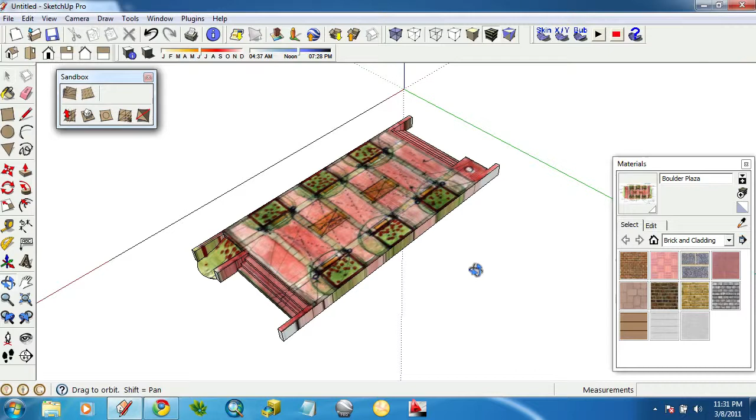Before I go into showing you how to create components out of the different planters, let me show you how to do a little bit of topography on the edges. It's exactly like I just showed you, with a couple different tools and at a larger scale.

On this side, I'll do something very simple, just a kind of flat area with a little bit of an arc. Nothing too fancy, but just so you can see what that looks like. I've got those 4 edges selected, hit the sandbox tool again, and it looks about like that.

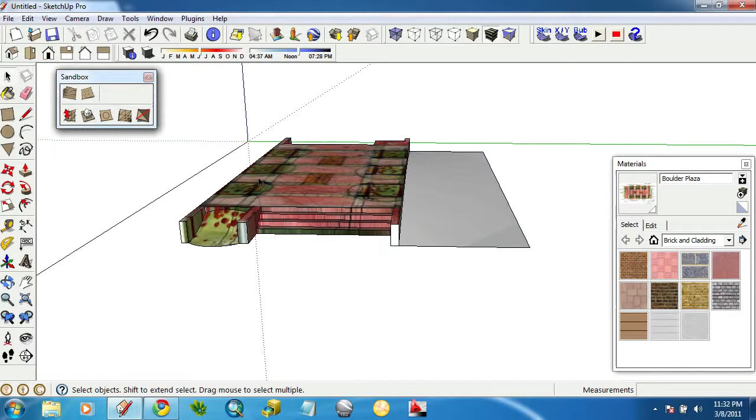Not so bad. On this side, I'll make it a little bit more detailed using the arc tool. The arc tool is really neat because it draws tangent points when you start from the end of an existing arc. Notice how that curve there is showing me that it's tangent.

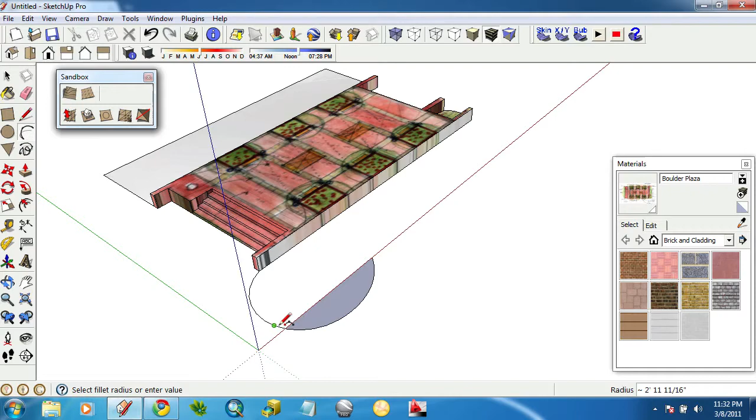Oh, I must have a line floating in there. From that point, this one won't work because of that line. Let's get rid of it. That must have been a remnant line from the image.

So you don't have to do everything completely straight in SketchUp. For this one, instead of doing a curved edge along this vertical wall, I'll just do 2 straight lines.

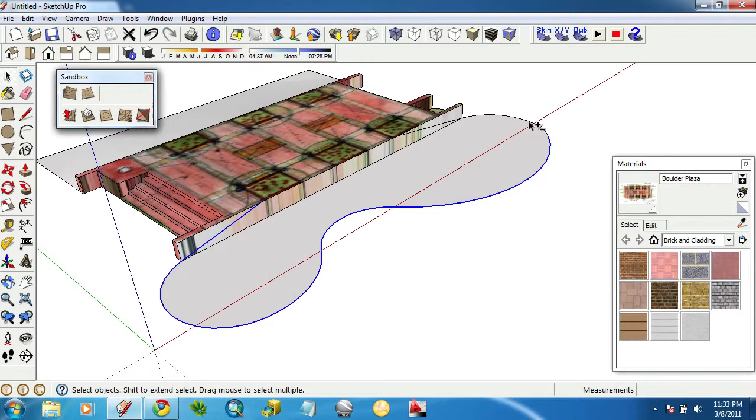This is a little experimental, so I don't know if this will quite work, but select tool, and very carefully grab all of my edges. There we go.

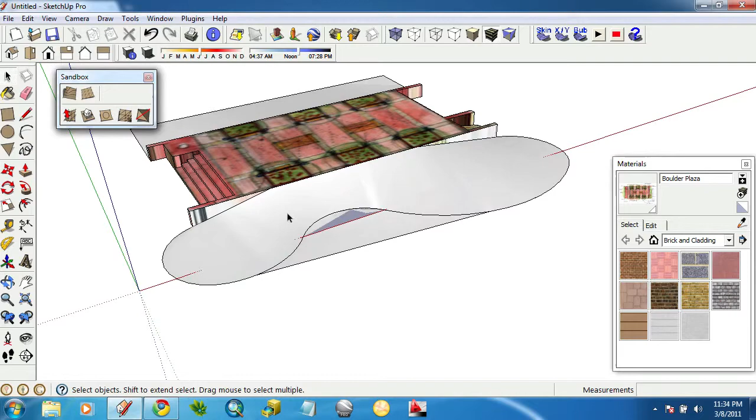And hit from contours. Whenever you've got an area that kind of bends in like this one, you'll get excess geometries. A really easy way to clean that up is to edit the component by double clicking and then turn on your hidden geometry. And we can see all of this extra junk in here.

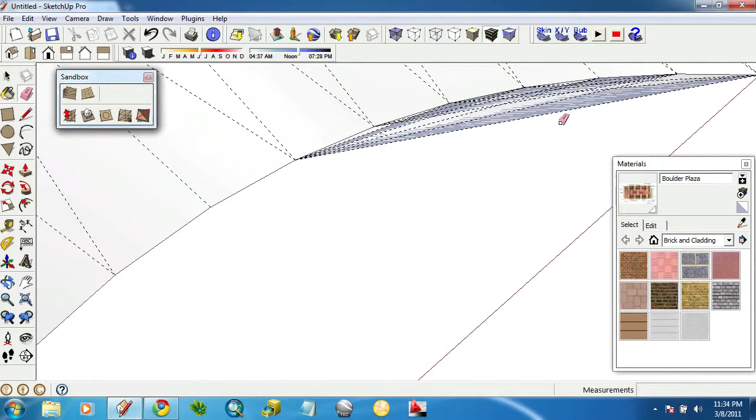So I'll take the eraser tool and click and drag very slowly. If you're picky like me, you'll probably jump in here and get rid of those as well. Oops, a little bit too much erasing. That's alright, let's just heal that surface by connecting that line there.

So there we go, fairly believable organic edge. Let's turn off hidden geometries.

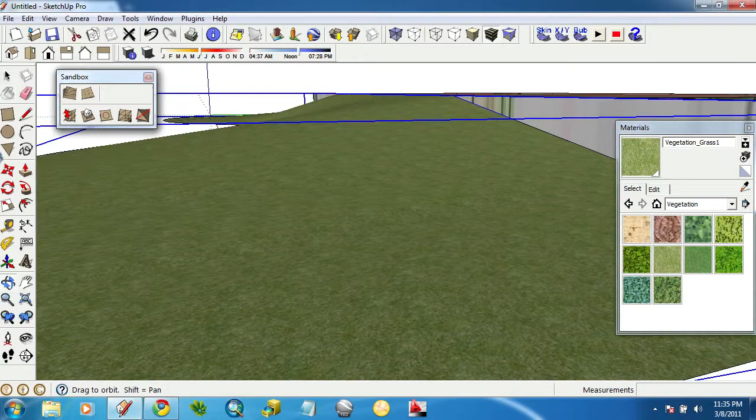And for textures, if you wanted to paint this as a grass texture, there is a vegetation setting in your materials. These are okay, not super nice, but we kind of run into that same thing as before. For grass it doesn't really matter, you can't really pick up on that broken glass effect, so that's actually not too terribly bad.

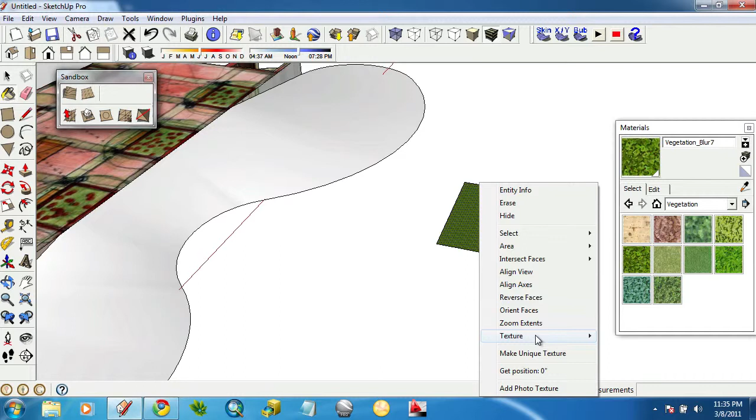Over here you can start to see it, but if you ever want it to be truly projected, you'd want to first apply it to something outside of that image, like this surface that I just drew. Let's use that one. Then right click, then make sure it's projected. Then you'd want to sample it.

Now on Windows, you've also got the sample tool living over here on your material browser. So alternatively, you can grab that and then edit this surface or this component and apply. So it seems like a lot of steps, but it's not too bad.

But since we're on the topic of textures, let's revisit importing an image, or importing an image file as a texture. So I've got a little box here, and for the sole purpose of something to apply to, I'll go to File, Import.

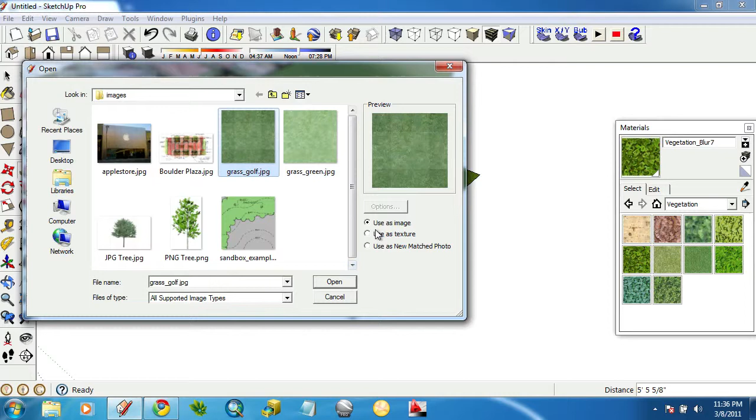Now in the Images folder from the files available on Blackboard, there's one here called Grass Golf JPEG, and it's just got a little crisscross pattern. But this one, when you use it as a texture, it will repeat based off of its first input.

So if I click right here, that will be the size of my repeating texture. I'm going to make it about that big. And notice that that square is now repeating.

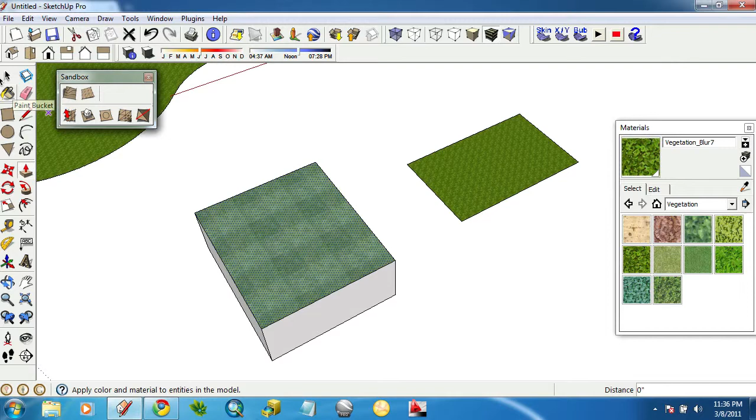If I right click on that and go to texture and then position, you can see the size of that image. The size of the actual image will be in between your 4 push pins. I won't get too much into the push pins right now, but it kind of gives a nice little effect. Let's go ahead and sample that.

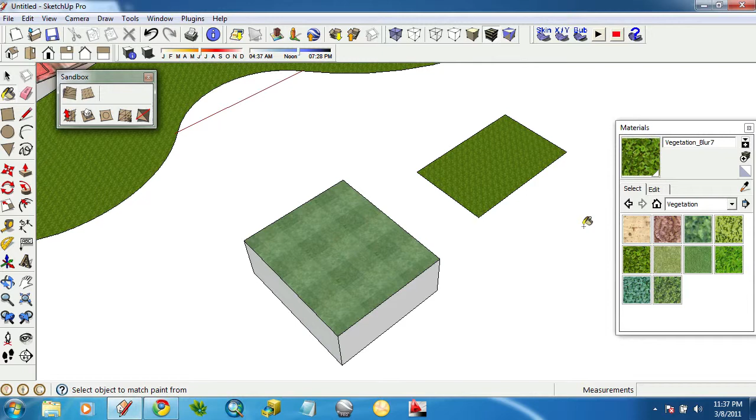Oops, and I forgot a step. Right click, make sure it is projected. Just trust me, it won't work quite right if you don't do that. Then sample it, then edit your component that you'd like to put it inside of and apply.

So someone is being very anal with the lawnmower on that side. Let's do it on this side too. Oh, and same thing as the other side, we've got some extra geometries, and I've mentioned that Z-fighting before, so let's fix that.

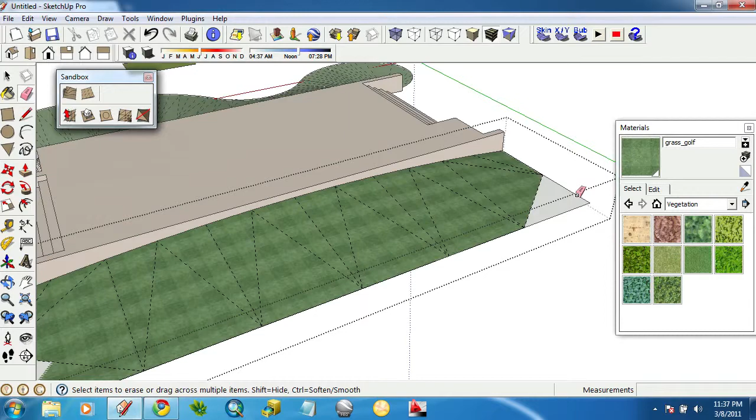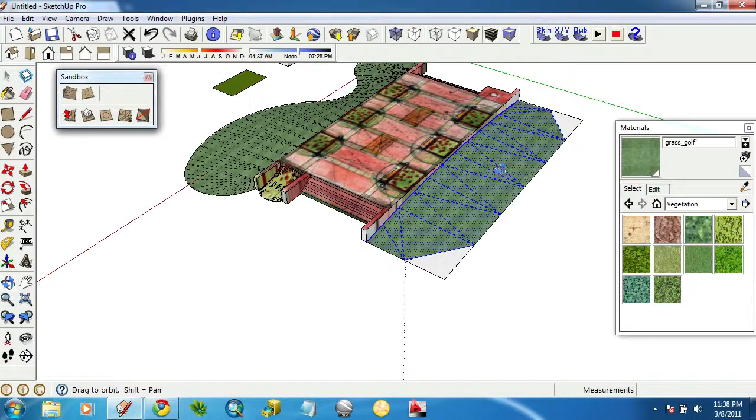And if you ever don't want these to be components anymore, all you have to do is right click and select explode. So I generally tell people that you should kind of keep things in components, but if it's a real simple model, it might be a little bit easier, especially when you're learning the ins and outs of SketchUp, to go ahead and explode those.

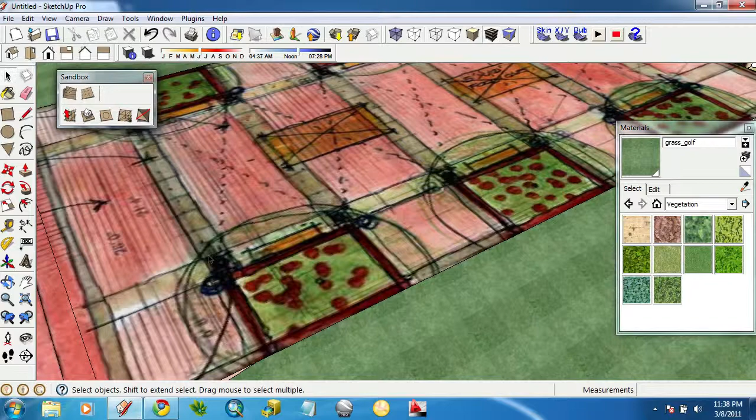So I will turn off hidden geometry and get rid of those guys. Alright, so now finally on to the review of where we were in class, and it was turning these into components. So all I did was draw a box around that free form geometry, and with it selected, the surface and the edges, I will make that a component.

Good idea to name these too. Otherwise you'll end up with a lot of components. Now, and I forgot a step. Right click, make component.

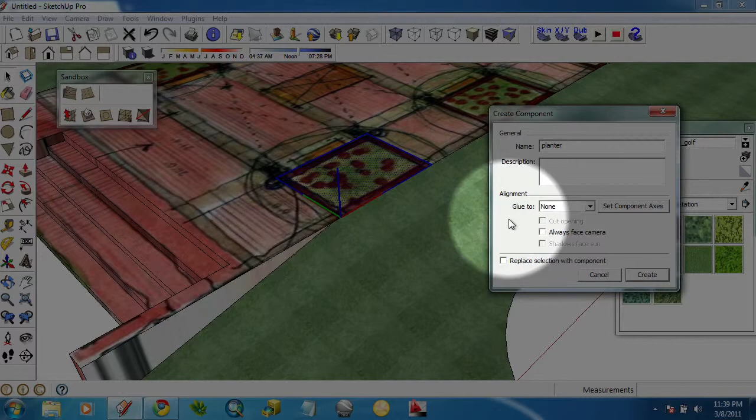This one, very important. If it has shared geometries, you know, this edge is shared with that surface, by default it will not replace the selection with component. So make sure that that is checked. Now it will prompt me if I want to replace it. I'll hit yes. But notice when I click on it, it is its own component.

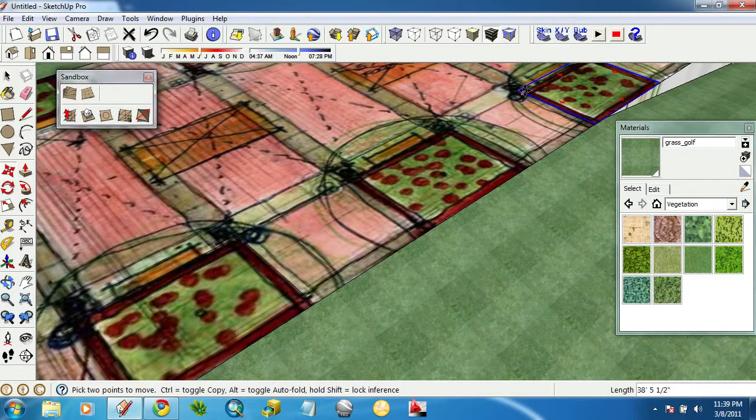And I'll go ahead and make a copy of that down to here. Do a 2 forward slash. Now that put a copy there. But now, you know what?

I'll just go ahead and select those. Do a copy. And then I will scale those by negative 1. And then I will move those to the opposite edge, making sure that it snaps, and then I will do a paste in place. So again, I'll review what we just did in class, but repetition is good.

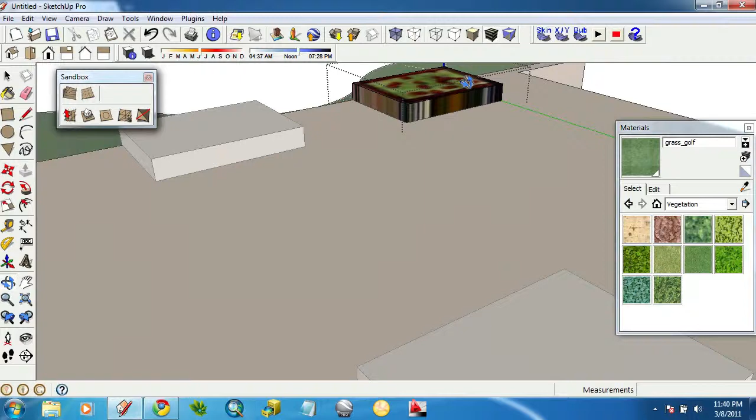So I'll push pull it up 18 inches. And give this a little bit more detail. Slightly different way that I did it in class, but still results in kind of the same thing.

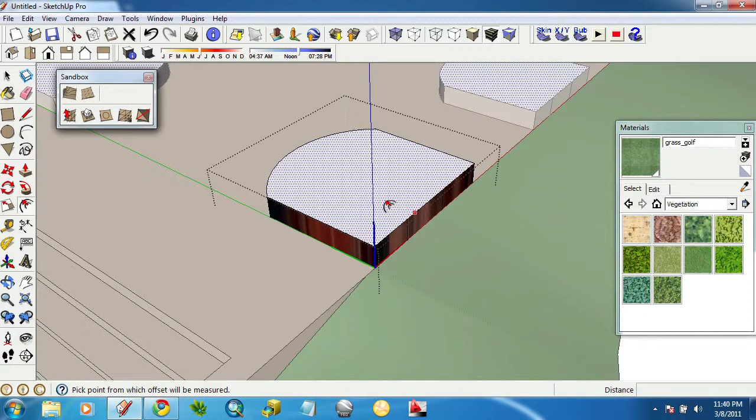I'm not too worried about the textures because I will just paint over them anyway. Grab the offset tool, grab the push-pull tool, and let's go to in-model textures and slap this one here.

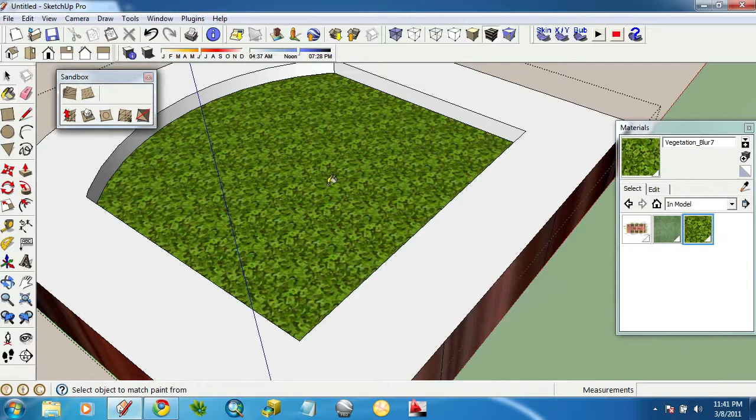Now, if you ever see a texture and it doesn't quite look right, if it looks like it's a little bit too detailed and that repetition is a little too easy to pick up on, also remember you can edit it directly to change the size. So I'll go ahead and say, let's make that 5 feet instead. Depending on the style that I'm looking for, that might be a little bit more acceptable.

Let's do the push-pull or the follow me thing. And whenever you do follow me, sometimes it helps to draw a little helper geometry. So I've got this little kind of ear of a shape just kind of hanging off the edge.

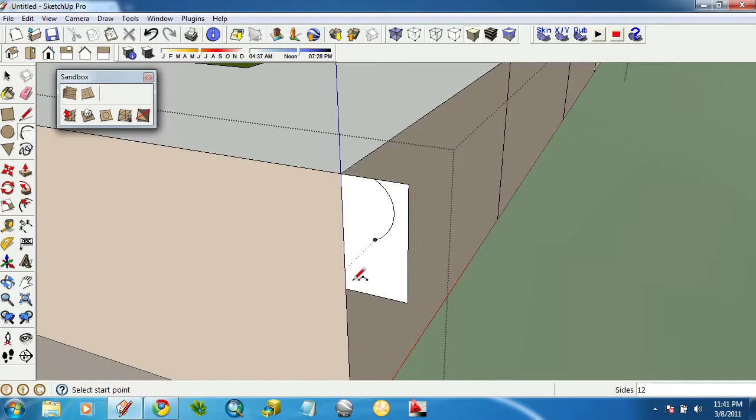And we'll give this a treatment like that. Something to be careful about: notice how that edge I drew kind of went over the edge just a hair. Just be aware that this may happen.

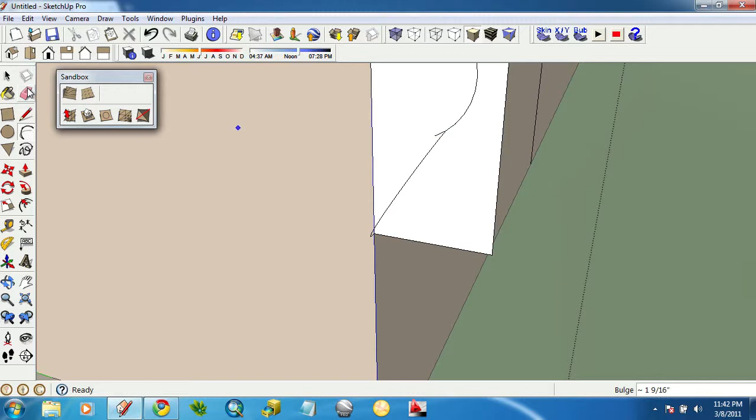Sometimes it causes problems. So I'll make mine not quite as curved. There we go. Now, I erased a little bit. Oh yeah, there we don't go.

You also got to be careful about which plane you're drawing on. That's not what I wanted to do. Undo. Let's try it one more time. Third time's a charm.

Sometimes you need to orbit to get the right view. There we go. Another reason why you want to use a click-release-click method of drawing instead of click-drag-release. And I'm also noticing here that for whatever reason I've got a couple extra lines. I don't want those, so I'm going to go ahead and erase those.

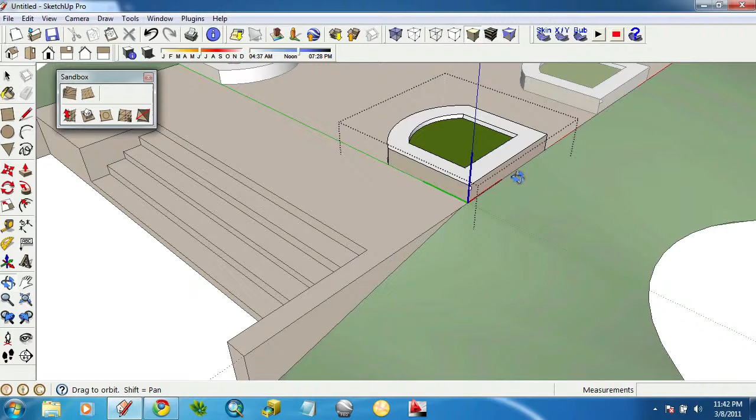Alright, so the follow me tool is right here. And the hard way to use it is actively select. You grab the tool, click a surface, and try to essentially walk the dog. And even around this corner, I'm getting kind of caught up here, and it's being weird on me.

So I'll hit escape. Much easier to pick a path. I could hold down shift and carefully select this edge, but just try selecting the surface. By selecting a surface, you're defining an edge. Sometimes that's good enough. That's my pre-select. Now I will grab the tool, and I can see down here all it's asking for is a face to extrude. Let's see what happens.

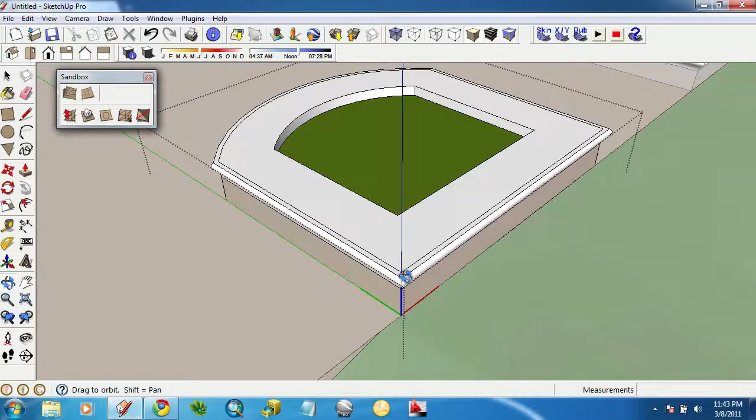Not too bad. Then let's use the eraser tool, clean that up. Oops, too much.

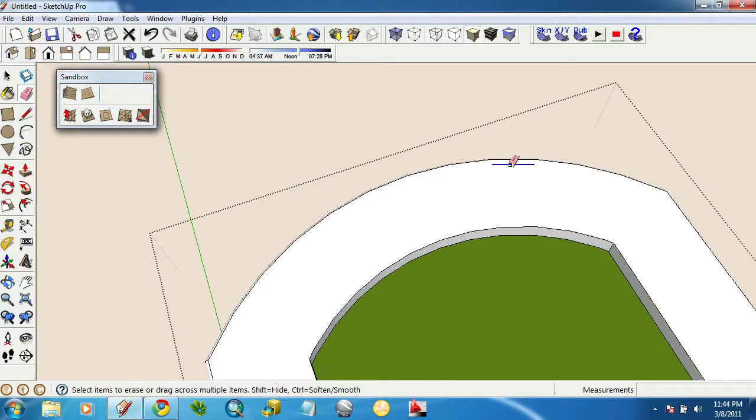There we go. So, let's go ahead and put some brick on here. I think I used that brick last time. We'll use this one. Oh, it's not showing up. The reason it's not showing up is because my face style is set to just shaded. If I turn this on, it should look good. There we go, not too bad.

Now these other ones are not reflecting that texture because we're in component edit mode. I'm only editing this component, not the others. I can't push-pull those, but I can reference them. So that's important to know.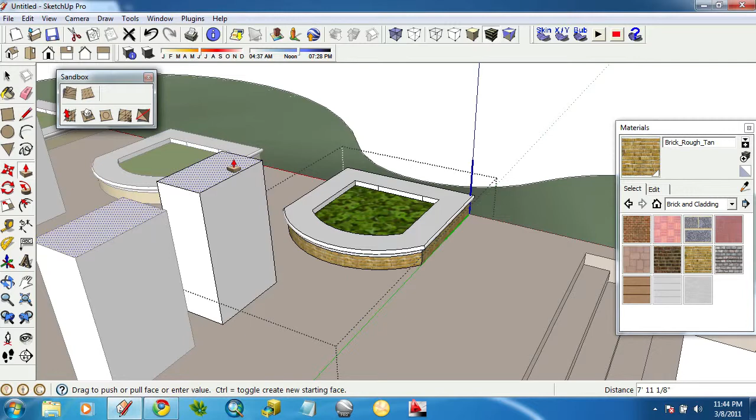If I were to push-pull something else, I could reference this. Let's give it a shot. Draw a new shape, start the push-pull, and notice my cursor is snapping to the geometries on that component that's floating out there. So, good to know.

Alright. Oh, you know what, now's a good time to save. Actually, about 20 minutes ago was a good time to save, but better late than never.

Alright, so on to vegetation. As I mentioned, there's three very common types. There's just straight 3D geometries.

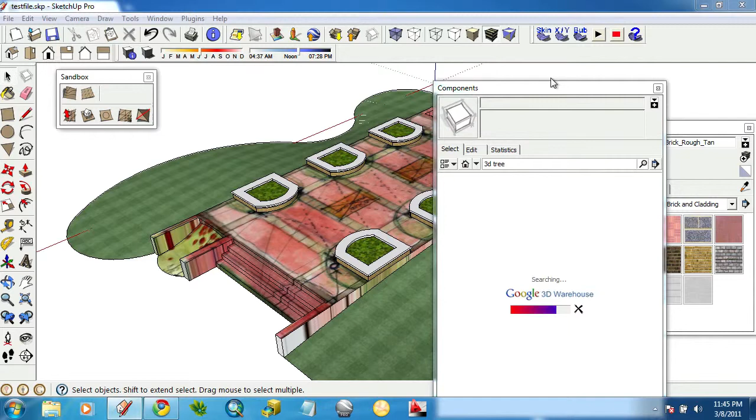And let's take a look at... going to search for 3D tree. You need to be online to do this. This is searching the 3D warehouse, so it's changing all the time. You know, this one looks interesting. Let's try that.

The downside to some of these is they're very high polygon. Some of them are, some are pretty good. This one, judging by the download speed, I'm going to say is a pretty high polygon tree. Really good for rendering, especially if you want to take this into a photorealistic renderer and you want each leaf to cast a shadow and receive a texture.

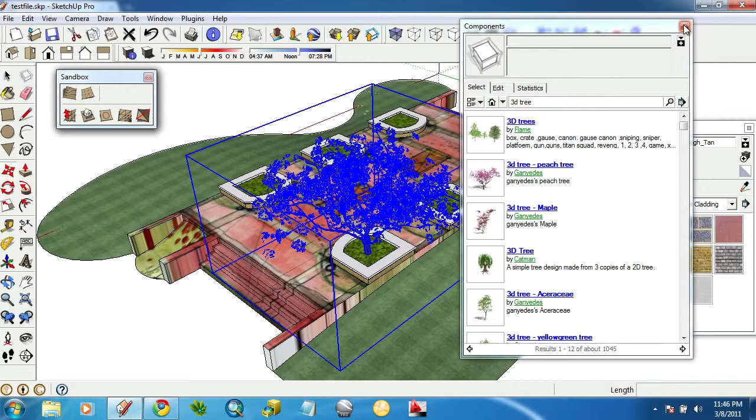Oh, this looks like bad news. Oh, there we go. Yeah, a very, very high polygon tree. So you can see where this is, how it looks, but if I were to make a couple copies of this, I would not be able to continue this demonstration. So let's go ahead and erase that.

The type of tree is called a face me tree. And it's not just vegetation, it really applies to...

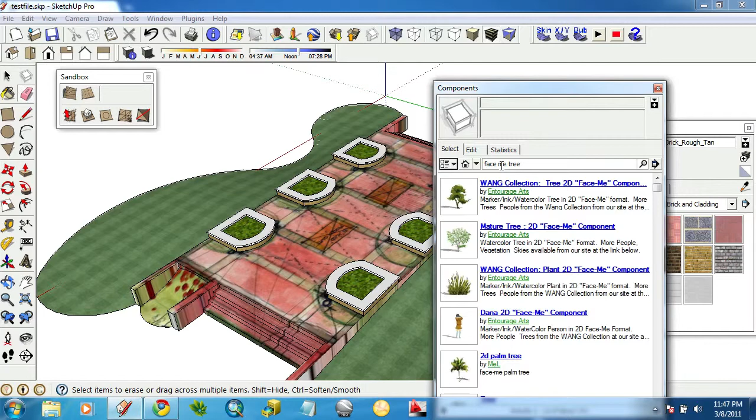Here's a very... oh, and something is not right here. Oh, once I place it, it's fine. So notice how this tree faces the camera.

Really good to keep your model lightweight. Looks really silly if you export an animation. But really good if you're just exporting still shots, not so much if you want to do an animation. If you look at it in a top-down mode, then it gets a little screwed up. So let's erase that one.

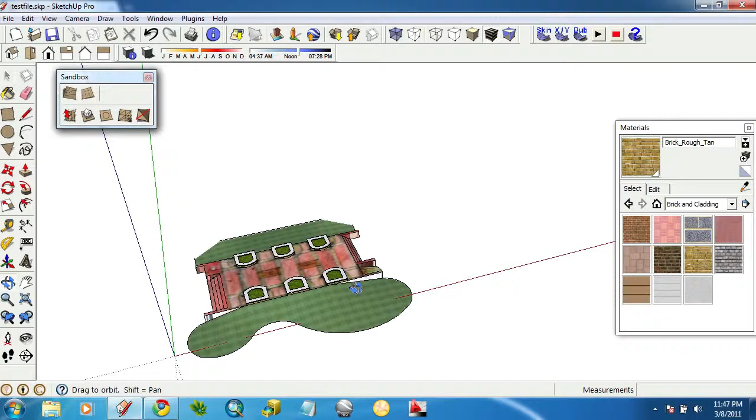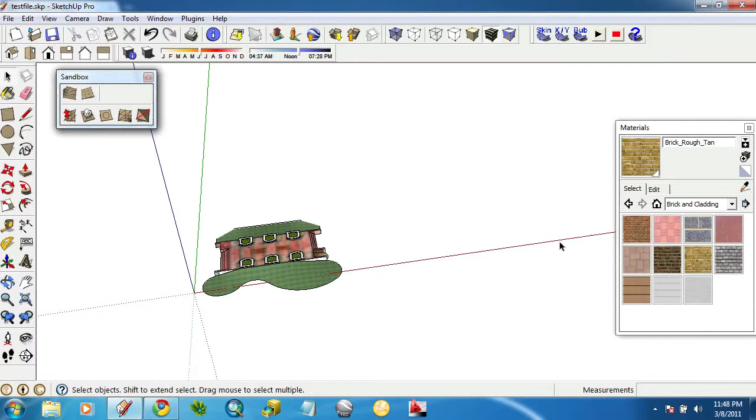But before I do the 2.5 dimension tree, let me show you how to make a 2D tree. Whenever you make a face me component, always keep your red axes in mind. It's very important where your red axis is, because technically that's considered the front of the SketchUp model. And when you specify a component to face me, it faces the front of your model first, and then it rotates as you orbit around. Just trust me, if you set it by anything else, it will go screwy.

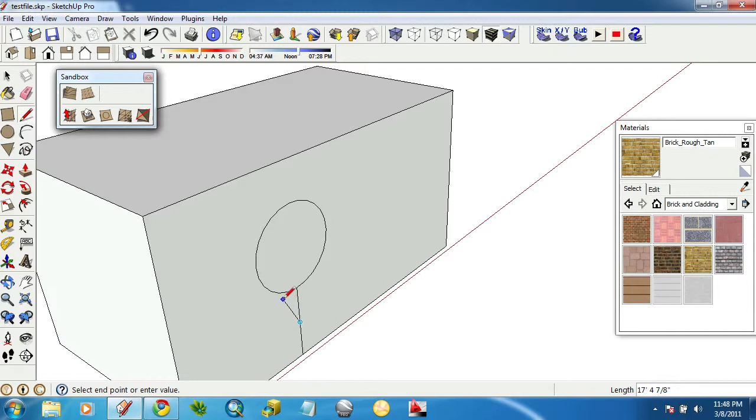So let's do a very basic tree. I've got a shape here, and this will be the ball on a stick method. So there's a very, very basic tree. Erasing those guys.

So if I select that, right click, make component, and I will replace selection with component, and also select always face camera. Create, and there we go.

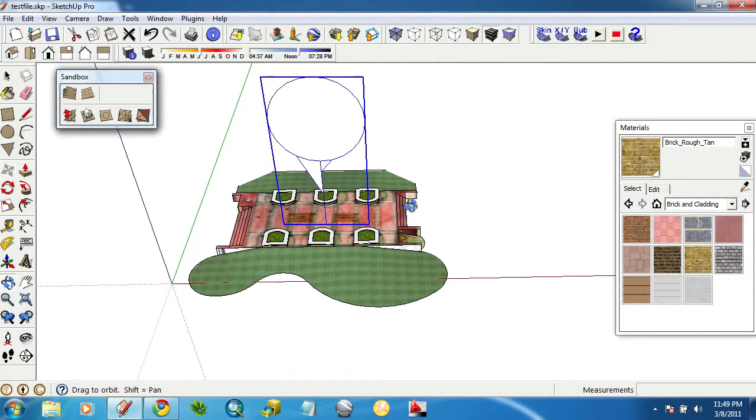One problem here, and I'm going to move this onto my planter. That's a pretty big tree. Notice as I am rotating, it's facing the camera, but it's rotating around this edge here. The reason is, by default, your components will always be in the lower left-hand corner, right here.

So let's move this over here to fix that. When you create a face me component, you want to set the axes to be the same. If you forget, it's easy to fix. I'll edit that component. Right click inside of this area here. I can click over here. Actually, I can, so never mind.

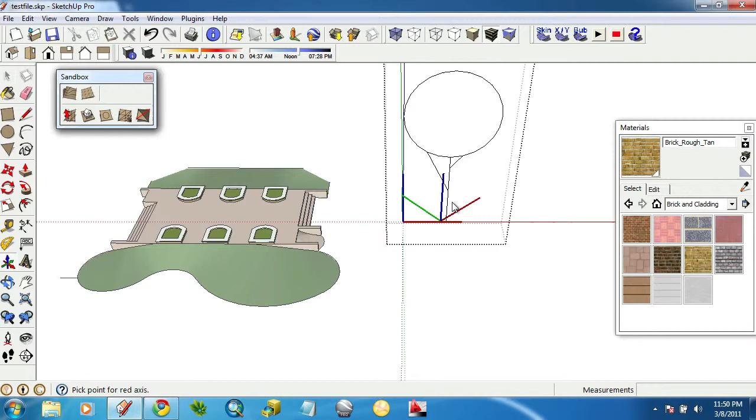But right click and select change axes, and it's a 3-click process. If you're not sure what to do next, just peek down here, it will show you. So I will click to set the origin, and I just totally missed what I was going for, so I'm going to do that again. Click there, set the red, set the green.

And here's why you want to be careful. Let me change it again and do it the wrong way. I'll set the red and set the green, and make my blue kind of upside down. Let's see if this does this. Oh yeah, notice the tree is way screwed up because I wasn't being very careful. So now I'm back to the green and blue in the right directions, and now that always faces the camera.

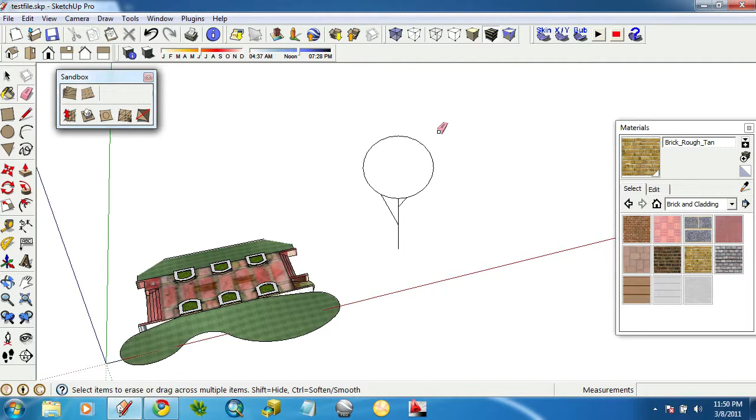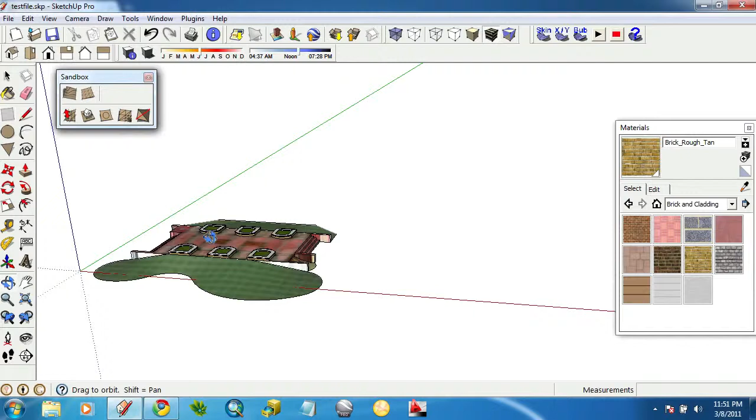Let's erase that and use an image. Again, it kind of helps to either have some helper geometry or position your camera so the red is right in front of you, because depending on your camera view, that really changes your default location. But it's really a good habit to use helper geometries when you can.

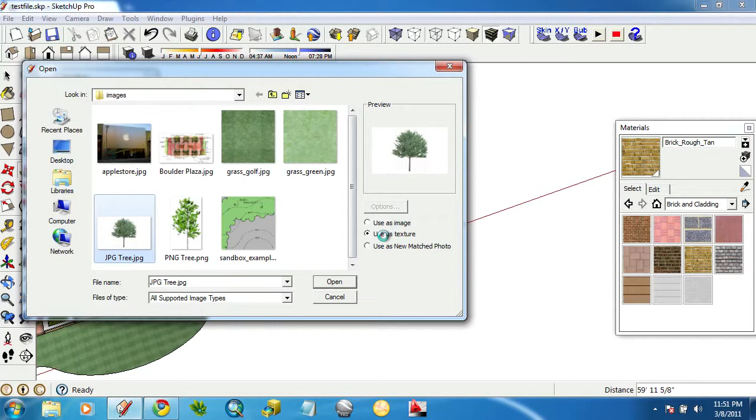So let's go ahead and import. This time I will do the PNG tree. Actually, you know what? I'll use the JPEG tree, and import this as a texture. I'm doing this a little bit different than I showed you in class, but the end result will be the same.

So let's go ahead and place that. Now this is a texture on this shape, so I don't need to explode it like before. But what we'll do is push all these edges around like that, and then I'll erase everything.

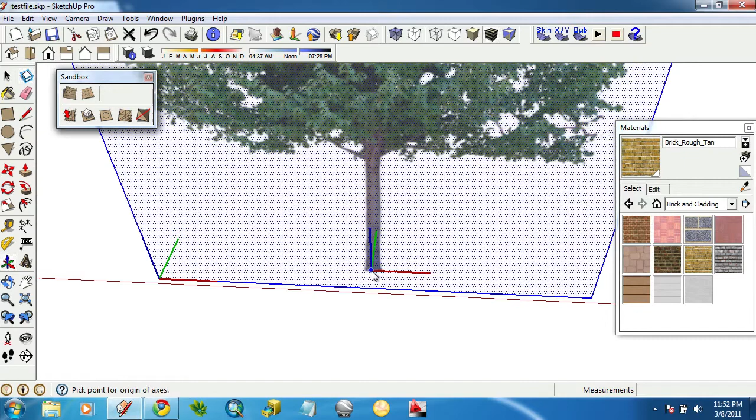And let's make this a face me component just like before. This time I'll set the component axes to be right down here at the trunk. Okay, small problem though, couple small ones. I did something wrong there. Trying this one more time. Make component... oh, it's face camera, I accidentally deselected that last time. I'm just too fast. Now hit create. There we go.

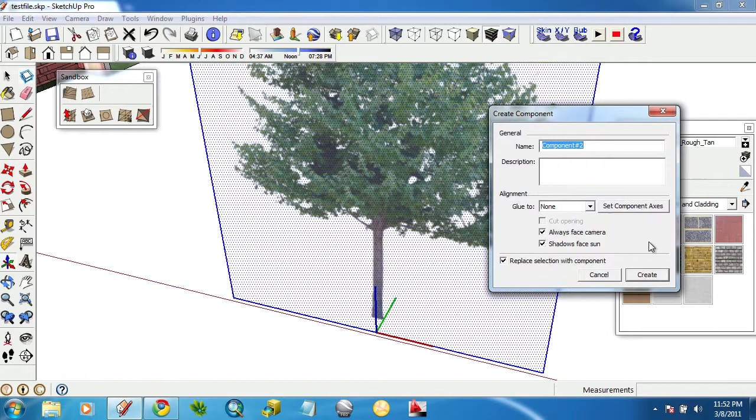So it is off in the component, facing the camera, but because it's a JPEG, this happens. It does not support transparent backgrounds.

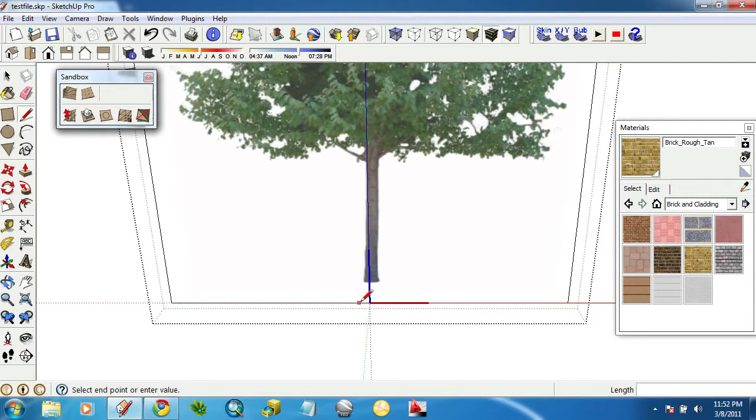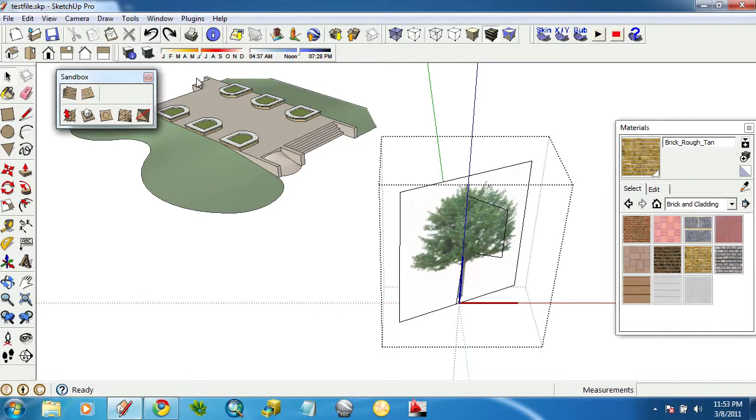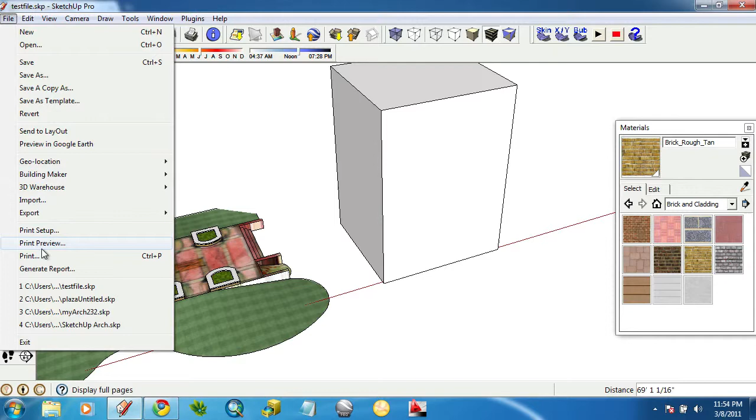So I will go ahead and undo that, and let's go ahead and just erase that tree. My best advice right now is just use something with a transparent background you can create in Photoshop. So this time I'll do it different. I will import that PNG, and this time use it as an image.

Notice the cursor wants to snap to different geometries. The helper geometry is nice. I'll just use this corner and hide it. So there we go. Now, because I placed that against this surface, it's glued to that surface. And it's also a little hard time trying to select just that tree. There we go.

You know what? Let's do this. Let's erase that, and right click on this. Because I erased it, I'm fine. But always check to make sure if a component is glued to a surface, because that will cause you some troubles. Really good for window pictures if you always want them to be glued to a surface.

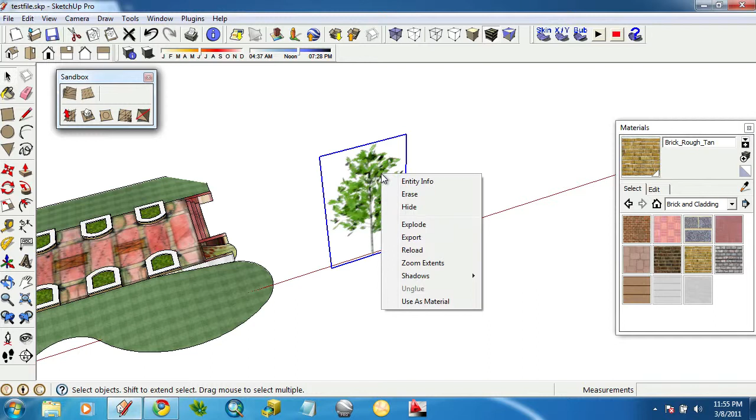For this example, we don't, but there's my tree. We can't make it a component right away because of that weird wrapper, that image, so I will explode it. Double click to select it all again and make component. Set the component axes. Always face camera. Hit create.

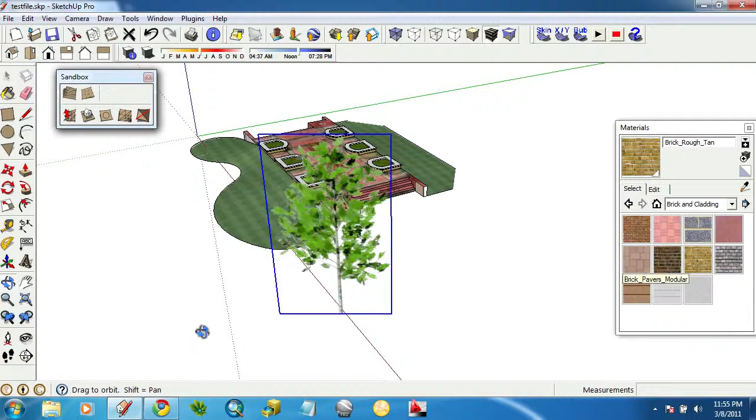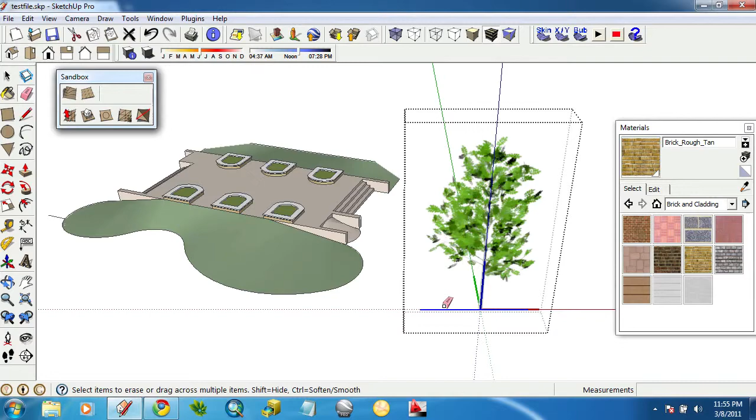So good. I need to edit this and hide these edges, which you can either shift select each one and then right click and select hide, or alternatively you can grab the eraser tool and hold down the modifier key, which for Windows is shift, and erase it. So this works really well for trees that are kind of just really quick and easy to make.

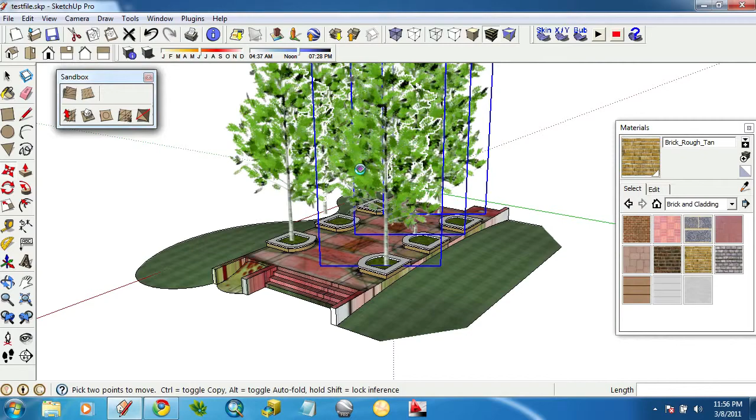And I'm going to make a copy of that. Oops, not that. Notice how I'm referencing the same corner. Now in class I showed you how to put these inside the component, but I don't want to do it for a specific reason here. Now they're all a little bit too big.

The fix is to edit that component, grab the scale tool, and just go ahead and make these squishy kind of bonsai-ish trees. You know what? I don't like that. Let's undo.

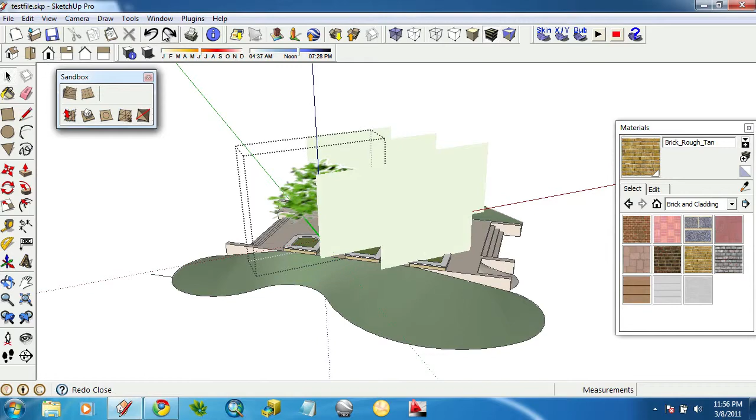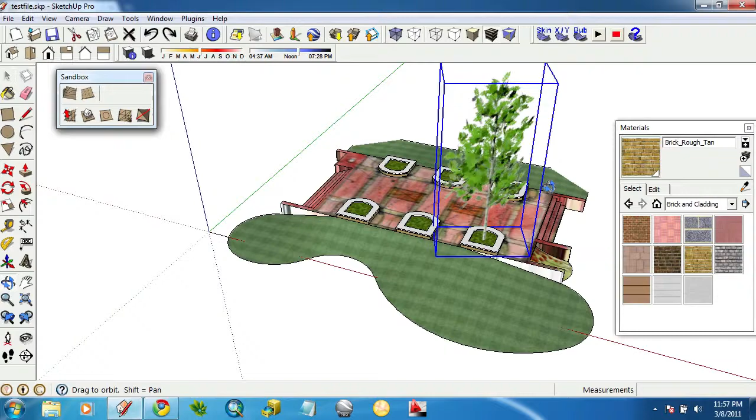Now here's a really good situation. I'd like to possibly hide the model and hide the rest of the components. And you know what? I'll keep the model on. Let's go ahead and scale that down. So I wasn't being too careful. Let's just undo and try that. This time I'll scale it before I make the copies.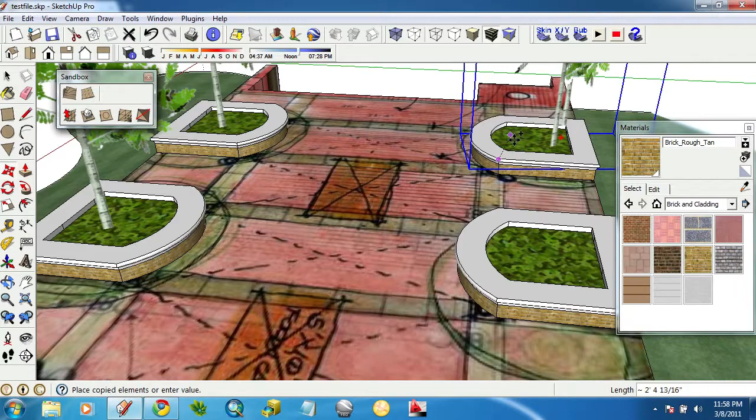And I'm tapping the modifier each time for this. There we go.

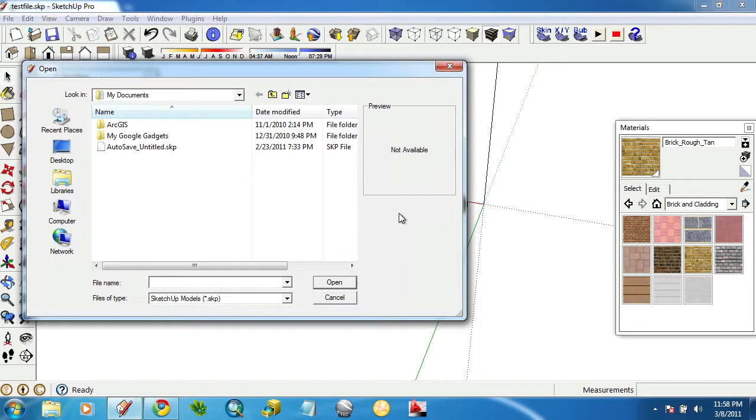Okay, so onto the 2.5 dimension tree. There's a couple of ways to swap. We could right click on the component and go to reload. So I'll show you this one first. And I'm going to navigate to the SketchUp folder.

And I'll select the big one, now let's do the flowering 2.5D tree. Notice it swapped them all out. So that is how you do a mass swapping out of components.

The other way is to swap out components that are in your model. To do that, you need the component browser. And you have a component in your model, and that's what that little house is, the house is the universal symbol for that. This is in my model.

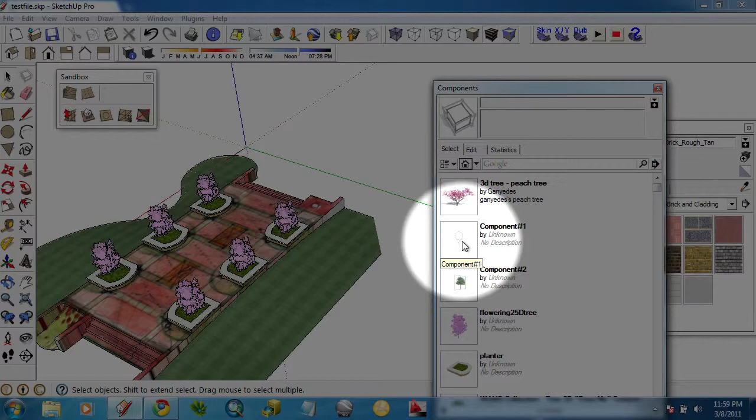There's lots I haven't used. But let's say I want to swap that out with that whole two-dimensional tree that I made previously. Here's a really easy way to do it. In the component browser, you can right-click on any component and go to select instances. Notice in my model, those are now selected. Then you can right-click on another one and select replace selected.

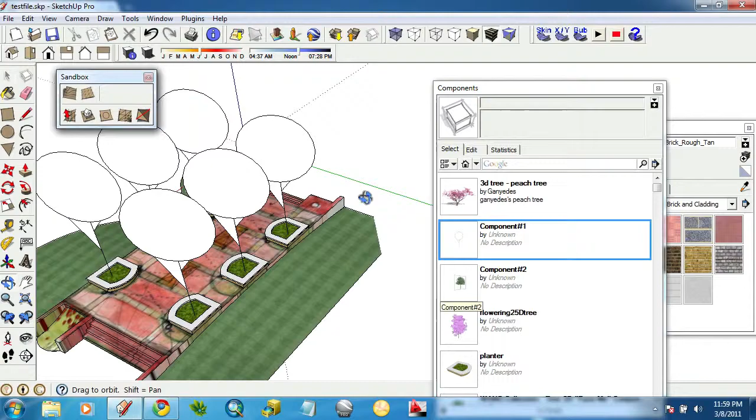So a couple of really nice ways to do a couple really quick swaps.

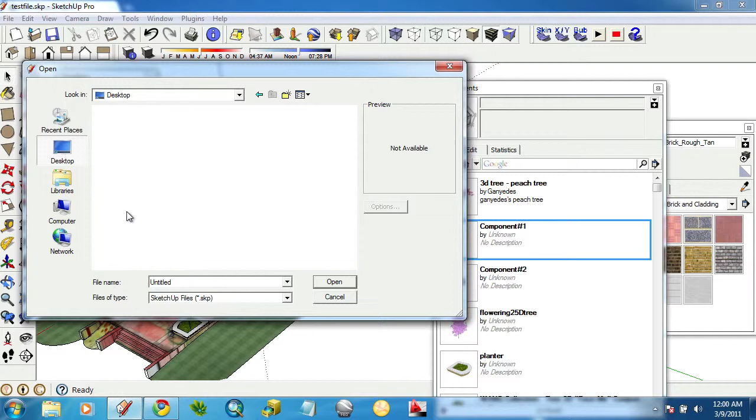Now what I'm going to do is import another model, so I need to tell this to be SketchUp. Whoops, and I need to go to the right folder. This time I select this Tom's Desk. That's a really nice one.

And I'm just going to sit it in my model for the sole purpose of getting it to show up in my models.

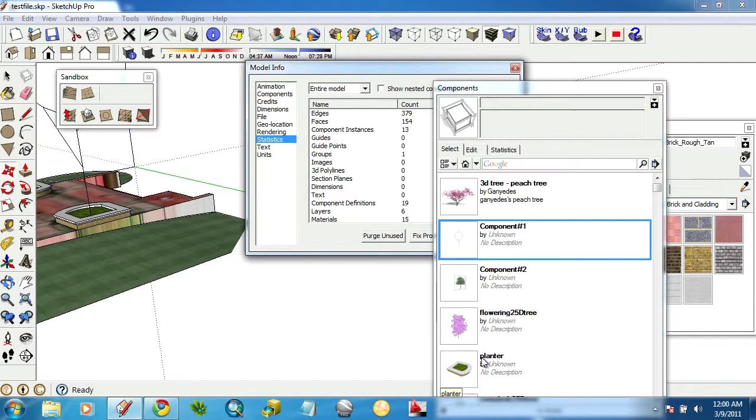Now another thing I'm going to do here, this goes for your components, it goes for styles, it goes for your materials. Whenever you add something, even if you delete it, it still is saved in your model. And it can make the model very large and sometimes difficult to work with and a little bit difficult to navigate through. So if you go to your model info, which is underneath window, then go to statistics, you've got an option here to purge unused, and keep an eye on what's happening here when I click that. SketchUp just does a quick check, and if something isn't being used, it just gets rid of it. So it's good to know about that.

Now it's only showing me the three components, which is the horrible tree, the nice one, and the planter we created. Let's go ahead and get rid of that.

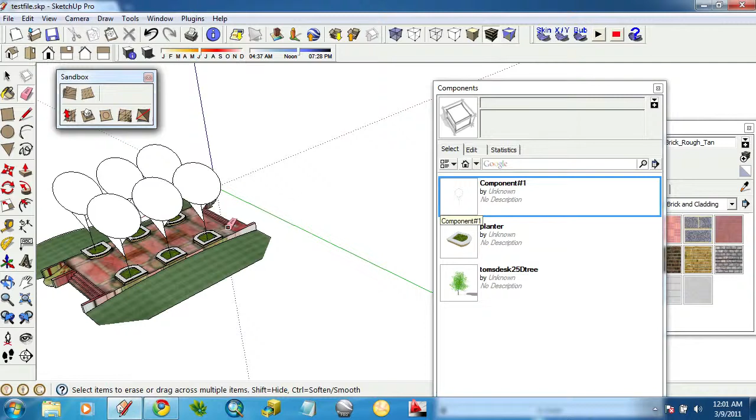Same steps again, but this time I'll do it a little bit different because I can very easily select the top of these and just grab them in the model. But that can get tricky, especially if you have an elaborate planting plan. You can't navigate in and around your other plants and your other models.

So if you can't select them in your view, just right click in the component browser and do select instances. Now, they're already selected, so I can't pick it here, but they're selected. You can right click on the component that you'd like to replace and select replace selected.

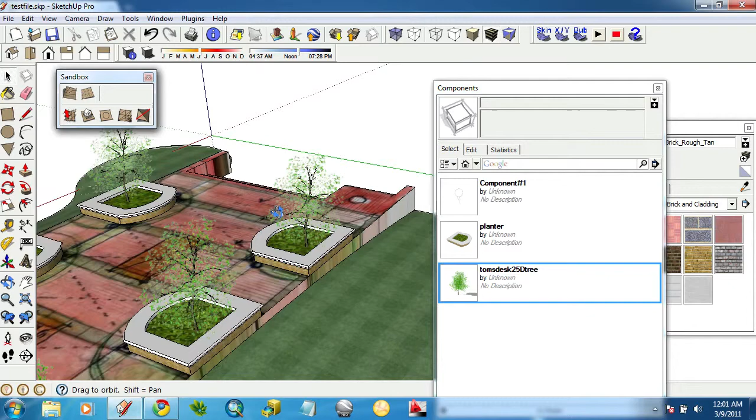So these are very small. I'll go edit that component, grab everything inside of it, grab the scale tool, and a couple things here. I've got to make it larger. Because I'm in the component, I'll want to reposition the base manually.

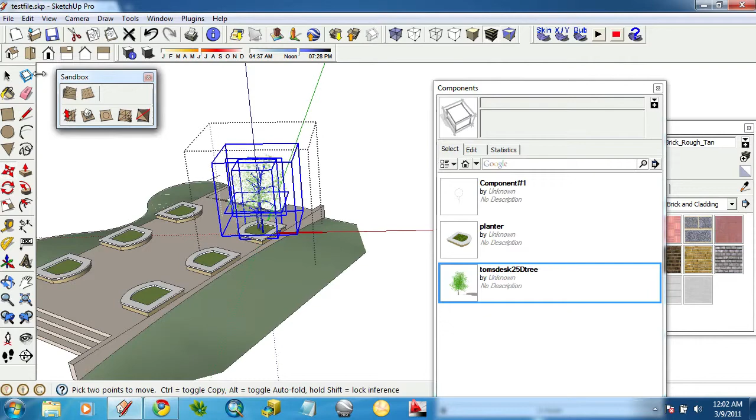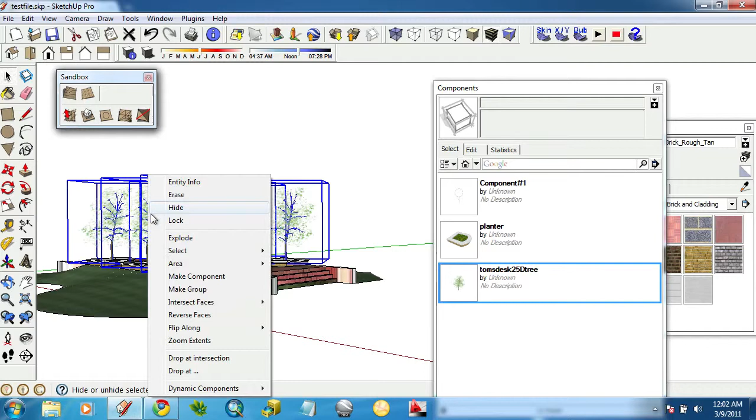Now hopefully these are all still lined up reasonably well. So the last thing I will show you in this video is the Randor plugin. Notice that these are all looking exactly the same. I can't remember if this is under the right click menu, it's not. The Randor plugin is somewhere up here, I think it's under plugins. But you'll want to select the components, go to plugins, and it's called BD Randor.

And keep an eye on the components. Each just randomly takes on a new size. So that works really well. Vegetation works really good, and so do boulders.

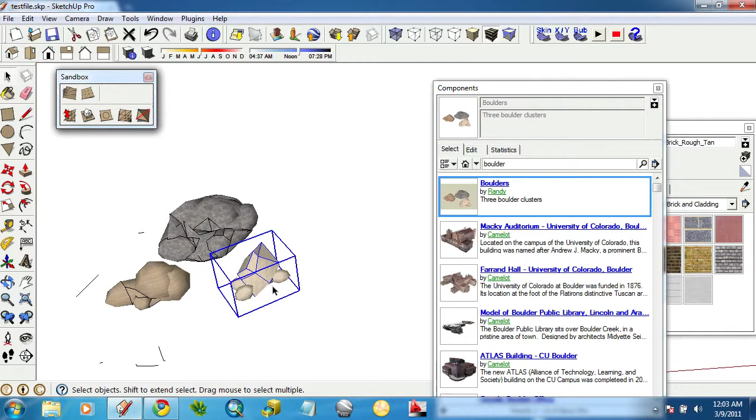This particular model's got a lot of extra junk in it, but that's kind of a downside to working with the 3D warehouse. So for example, this little guy here, if I make copies of that, that obviously looks very fake.

If I select those and go to Randor, now it looks like boulders, sort of. So there you go, that should get you all caught up with everything we covered and then some. And as always, email me if you have any questions.